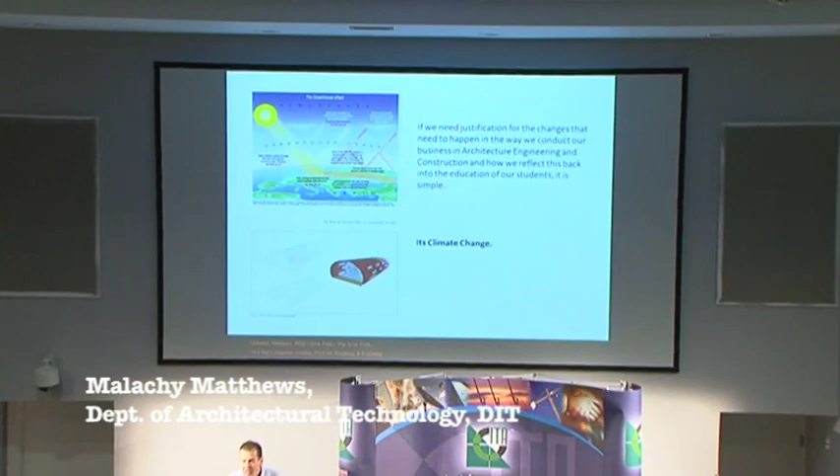Folks, if we need a justification for the changes that need to happen in the way we conduct our business in the architecture, engineering, construction industry, and how we reflect this back into the education of our students, it's simple. It's climate change. Kyoto protocols and the later protocols are starting to drip feed now down into and affect us in our business. Recasting of the Energy Directive from the EU, updating technical guidance documents Part L, all making our business extremely complicated, but having a direct effect on how we go about our business.

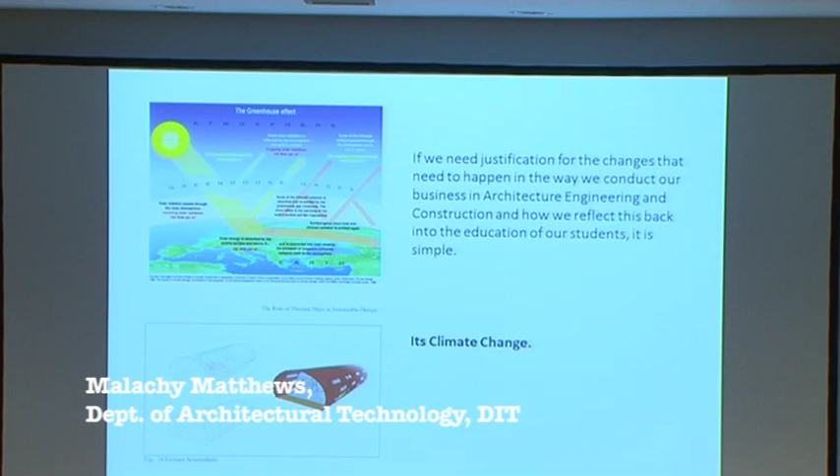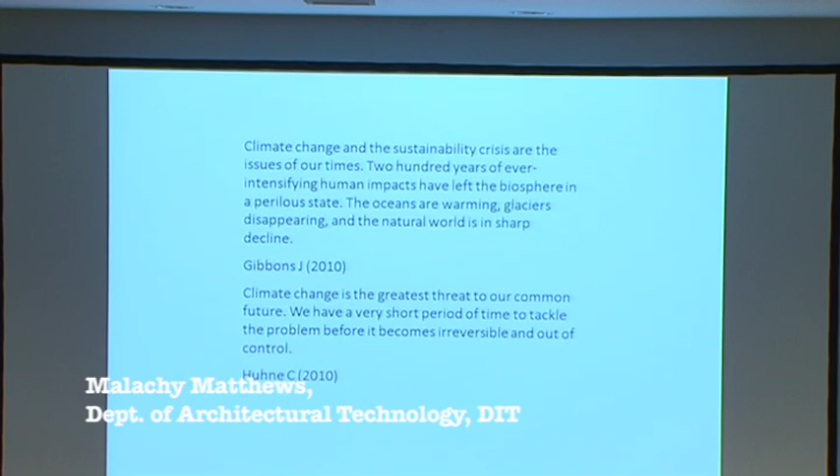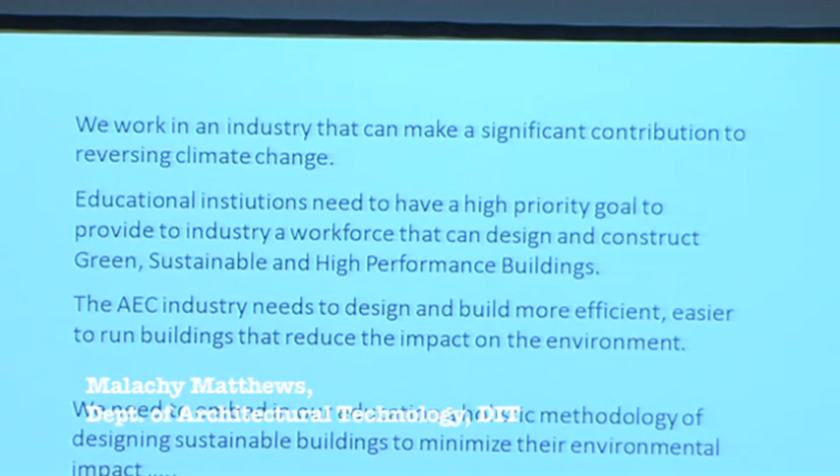Chris Huhne is Secretary of State for climate change in the United Kingdom, and he says climate change is the greatest threat to our common future. And we have a very short period of time to tackle the problem before it becomes irreversible and out of control. We work in an industry that can make a significant contribution to reversing climate change. Educational institutions need to have a high priority goal to provide to industry a workforce that can design and construct green, sustainable and high performance buildings.

The AEC industry needs to design and build more efficient, easier to run buildings that reduce an impact on the environment. We need to embed in our education a holistic methodology for designing sustainable buildings to minimize their environmental impact. This presents a challenge to the pedagogy by which we educate our students, and it presents a challenge in industry. That challenge in industry needs to be reflected back into the education of future graduates.

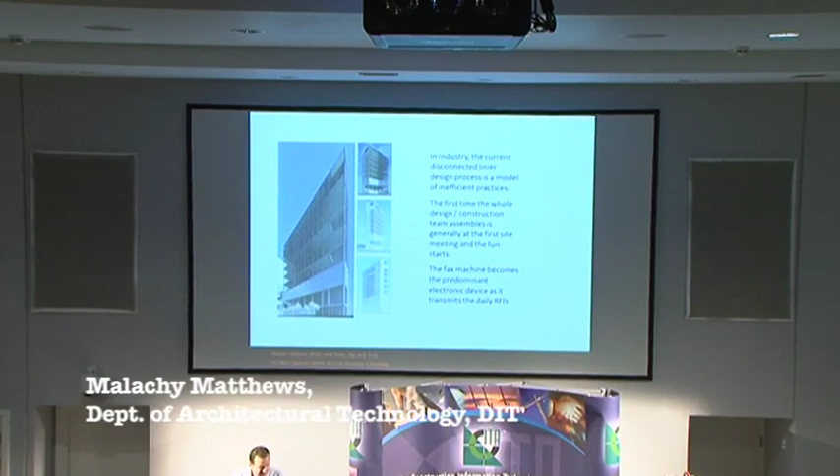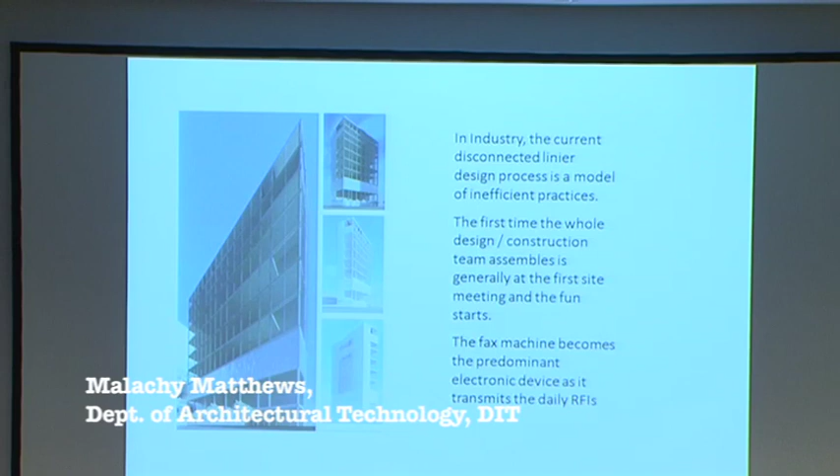In industry, the current disconnected linear design process is a model of inefficient practices. The first time the whole design construction team assembles is generally at the first site meeting where the fun starts. And the fax machine becomes a predominant electronic device as it transmits the daily RFIs. Any of us who have worked in construction know exactly what I'm talking about there. This linear process will have to change. And to do this, we face a major challenge. We operate in a system of hierarchy. The designers at the top, technical people in the middle, and the contractors left to put it all together and build it.

This is where BIM technologies and methodologies come into their own. The old hierarchies get moved aside. The linear design process gets binned in favor of a circular or elliptical design process where designers and technical professionals collaborate around the digital model, each bringing their own skills to the process in real time, and that's different. It's a bit of a utopian diagram, to be honest with you. To achieve that is going to take an incredible change of mindset, and perhaps that's the most difficult thing to achieve.

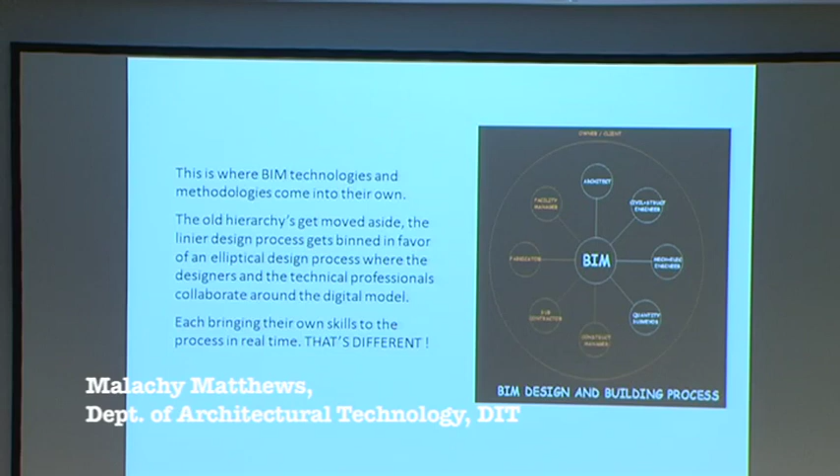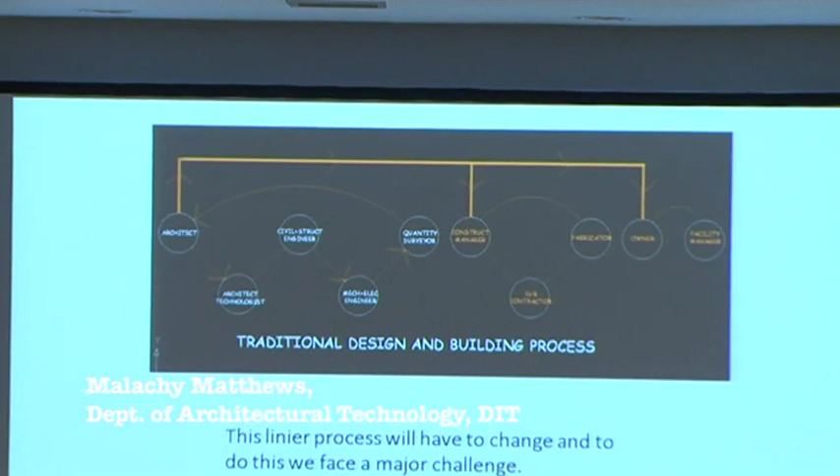Through my research over the last number of years, I've found that roles are blurring in the business. If I go back to that diagram, my colleague in DIT, Dr. Ken Beattie, who's involved in building services, will say, when it comes to the design of a building, why am I so far down the line? By the time I get the building, I can't influence the changes that need to happen in order to make this a more efficient building.

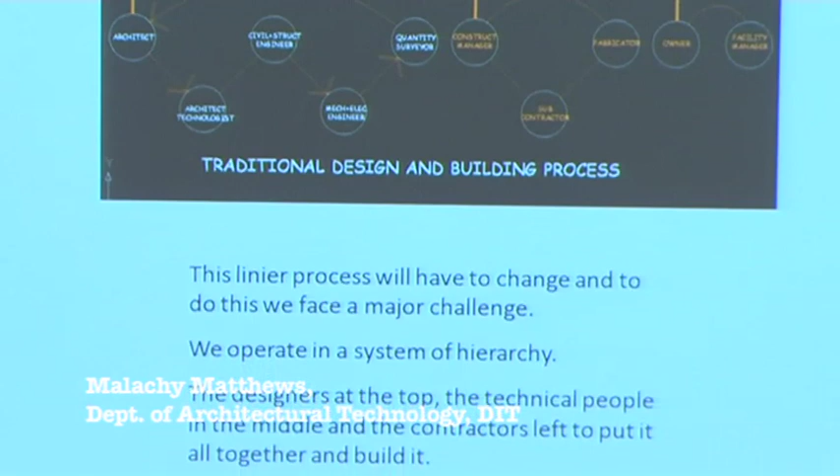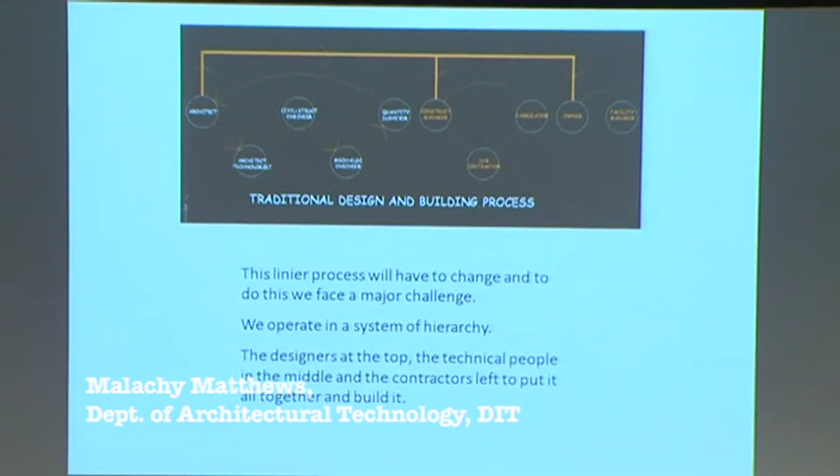Instead of being down the line, I want to be at the table, at the design, so I can bring my expertise in regards to simulation of options in order to give us a more efficient building. But if I'm too far down the line, I can't do that. Come back to this diagram of people operating and contributing to the model and then taking data out of the model.

It allows for that process to happen. It allows for people with these skills to be able to influence the design for a more complete, holistic and sustainable product.

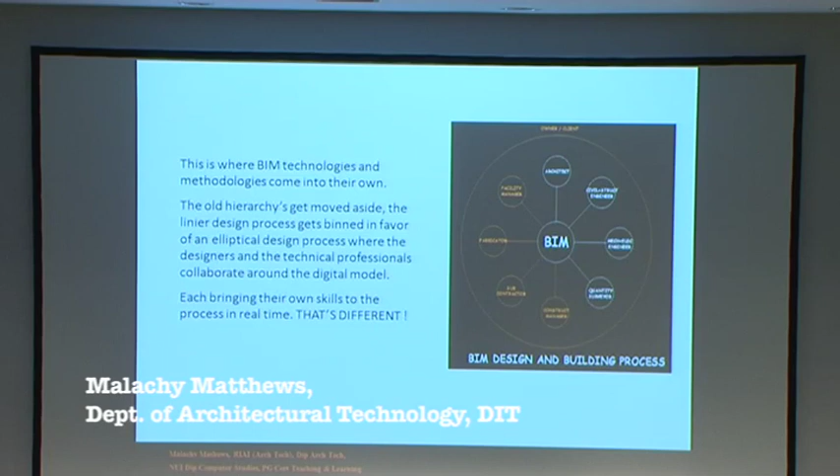In the concept, scheme and detailed design, we need to look at strategies. And this is a word that is going to become very familiar to you people in the business. Strategies for energy, strategies for solar, for light, building metrics, egress, water, airflow, fluid dynamics, system renewables, thermal comfort loads, sustainability compliance, value and cost and carbon footprint.

To achieve a holistic, sustainable design, I wonder, is there a case for what I call performative architecture? And that is architecture that's based not on the form of the building, but the function of the building, and the selection of materials influencing the function of the building.

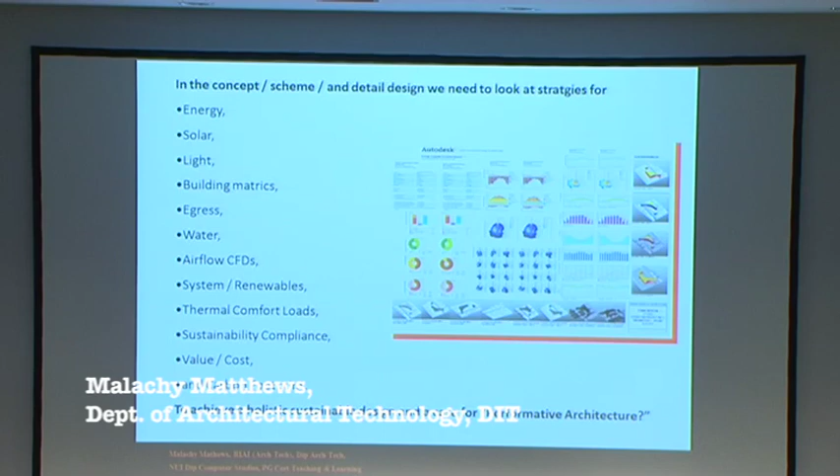There's a couple of examples of buildings I want to bring to you. Out in the City West, out that direction, I think you know there's an extraordinary building out there with an enormous glass facade on it, processing plant for printing, newspaper printing. If I ask you the question, was that building built for function, or was it built as a corporate statement? I wonder, what would you think?

You're driving kind of east to west. The building is prominently situated so that when you're driving, everybody sees this building. It's got an enormous glass facade on it. It's got all the manufacturing of the processing plant in behind it. During the summer, when you get a hot summer, solar radiation elevates the heating in that building to a point that the ink doesn't stick on the paper. Built for corporate identity rather than for function, in my opinion.

Another building that I worked in: the new Fingal County Hall out in Swords, a very, very modern building, and the architect had a fantastic attempt at bringing in sustainable technologies into the building. I worked in one of the wings up on the top floor, and natural ventilation was designed into that building rather than mechanical systems.

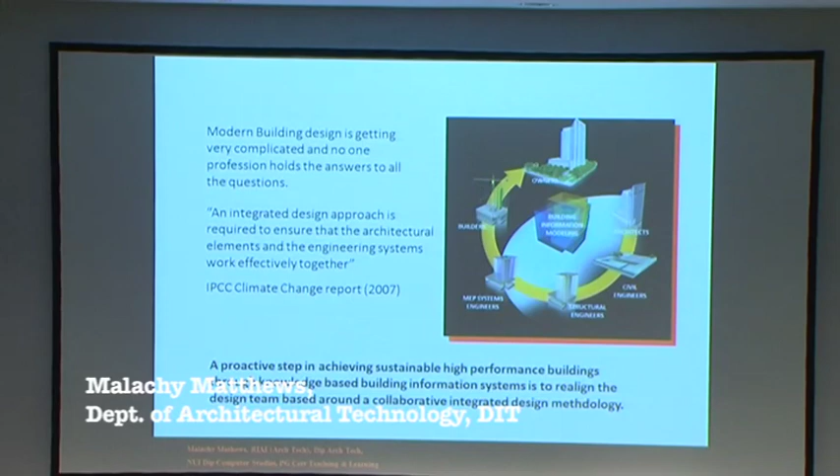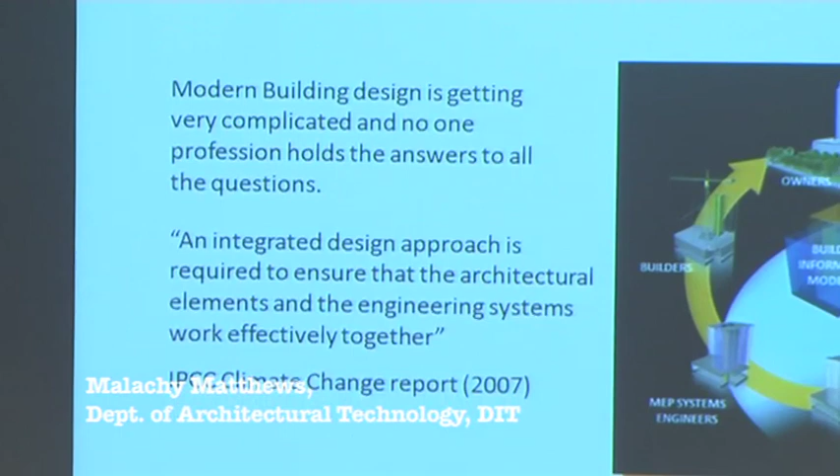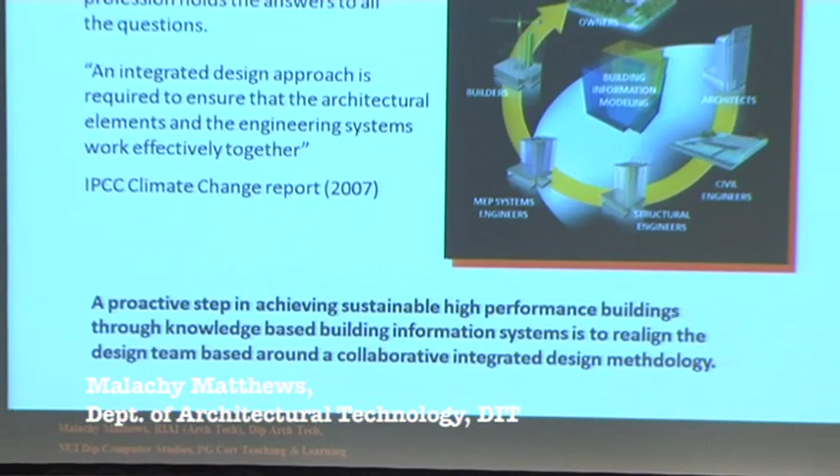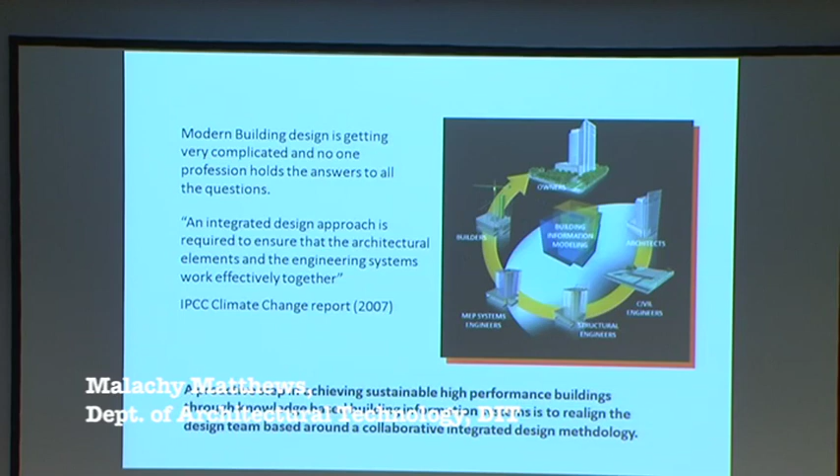The IPCC is the Intergovernmental Panel on Climate Change. In a report in 2007, they said an integrated design approach is required to ensure that architectural elements and engineering systems work effectively together. So perhaps a proactive step in achieving sustainable high-performance buildings through knowledge-based building information systems is to realign the design team based around a collaborative, integrated design methodology. BIM technologies provide the robust platform through its centrally located digital model and electronic collaborative methods to do this.

New building design and existing building retrofit can be analysed at both a macro and a micro scale using dynamic simulation methods. Now folks, this is something we're going to have to face up to in order for buildings to comply with new Part L regulations. We're going to have to go in and do this. You can sit down and work this out on a calculation basis, or you can go in and use dynamic simulation methods. We need to be able to measure what the changes are. If you can't measure it, you can't improve it. We want to be informed to develop strategies that will work for the climate, for the site, and for the buildings in question.

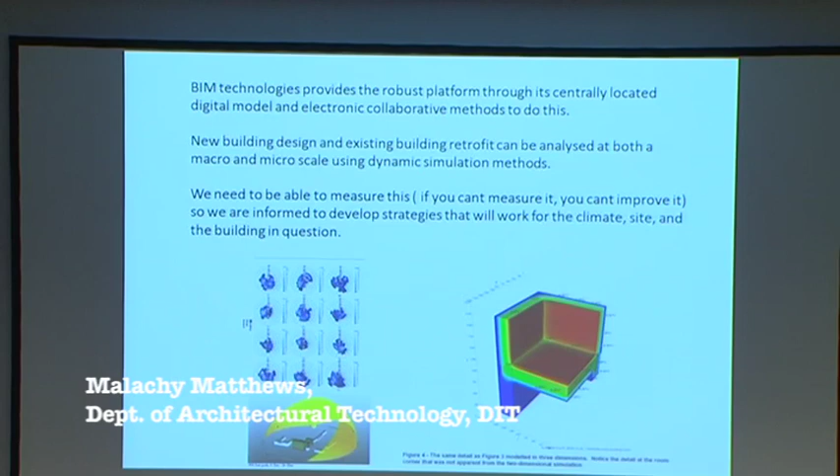That diagram on my left-hand side there is a 3D simulation carried out by one of my students in regards to an investigation in thermal bridging. This is as part of his research dissertation this year. But the advantage of doing this in 3D as against a flat 2D section is that he's pinpointed where the problem of thermal transmittance occurs, and it occurs in the corner, right in the corner. Now he wouldn't have been able to get that far unless he was able to do this in 3 dimensions.

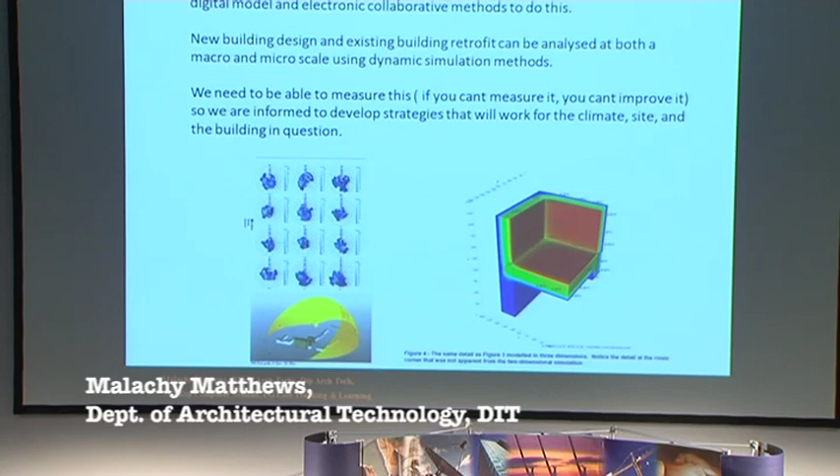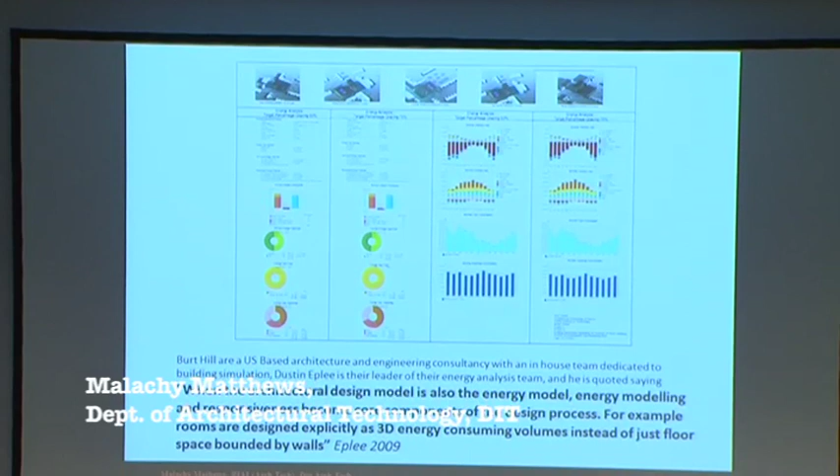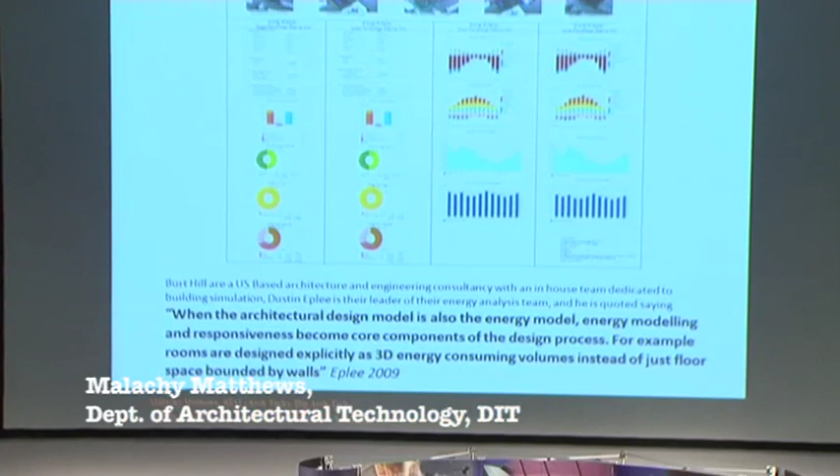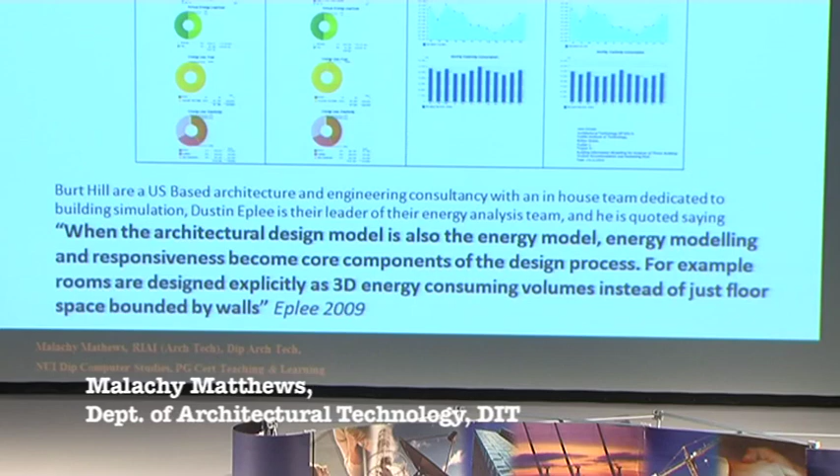Burt Hill are a US-based architecture and engineering consultancy. They have an in-house team dedicated to building simulation, and Dustin Eplee is the leader of their energy analysis team, and he's quoted as saying, "When the architectural design model is also the energy model, energy modeling and responsiveness become core components of the design process. For example, rooms designed explicitly as 3D energy consuming volumes instead of just floor space bounded by walls." This is thinking going beyond just form architecture. This is function architecture.

I want to give you a flavour of the dissertations that fourth-year architectural technology students have done this year. And I really feel that these students are pushing the envelope in regards to analysis and simulation.

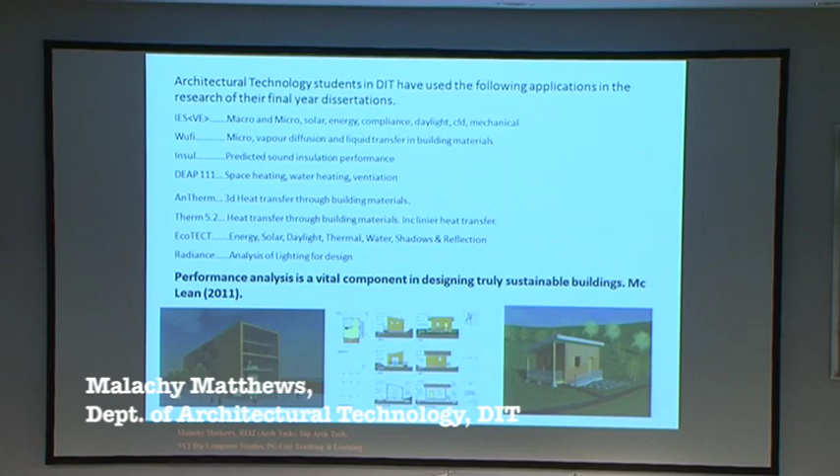These are the range of softwares that they're using. I'm sure you're familiar with a lot of them. IES, Don McLean's software developed over in Glasgow, can be used on a macro and micro level for analysis of solar energy compliance, daylight, CFDs and mechanical. WUFI is a German software used on a micro level, and one of the students is doing his dissertation on vapor diffusion and liquid transfer in building materials.

INSUL is a predicted sound insulation performance, so it involves acoustics and the acoustics of materials and how materials affect acoustics. DEAP you're more than likely familiar with. That's our Part L base standard. AnTherm is the 3D heat transfer through building materials. That's what the student used in that illustration I showed you. THERM 5.2 is the 2D version of AnTherm.

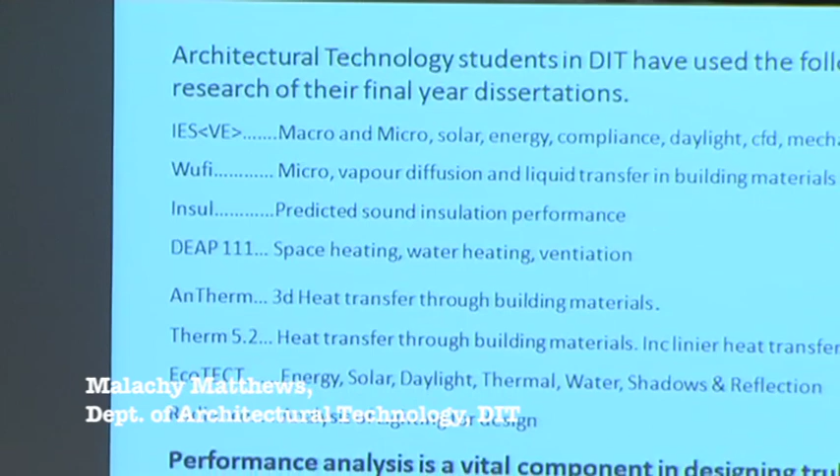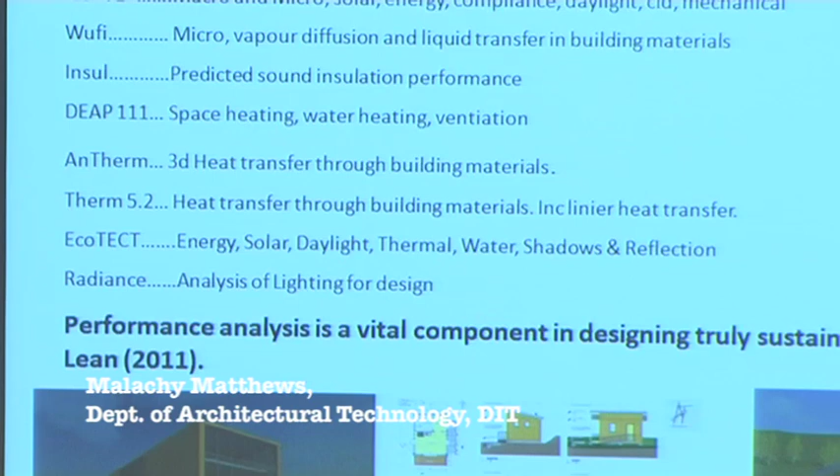Ecotect is now an Autodesk product, and again is a whole energy analytical software for energy, solar, daylight, thermal, water, shadows and reflection. And Radiance is an analysis of lighting for design. Don McLean in Glasgow says that performance analysis is a vital component in designing truly sustainable buildings. I'd say that predictive analysis is set to become an integral part of building design and retrofit.

I know that local authorities are under severe pressure in the next decade. All of their building stock, their housing stock, their commercial stock, their civic stock has to be brought up to meet the demands of the TGD documents. So all those community housing that you see, each one of those has to be looked at on an individual basis, and what strategies are they going to formulate for that building to meet the Part L requirements. In order to test options and strategies, they're going to need to run simulation. And if they don't have that expertise in-house, they're going to have to look outside for that expertise. There is enormous potential there.

Retrofit is the name of the game in Ireland for the next 10 years. We've been told to do it, we've been directed to do it by the EU, there's no choice, we have to do it. Where we're going to find the money to do it, another problem maybe, but this is something we have to achieve. So if I was in business, things like BIM technologies are things I'd be looking at.

I see the future of practice changing. No longer are you going to have, in my opinion, the firm of architects in Merrion Square, the firm of engineers in Harold's Cross, the mechanical and electrical guys in Fairview, all coming to site and meeting there. To me, the smart guys in practice are going to set up cooperative pods of interdisciplinary practices. How it's set up is their business, whether they are collaborative or whether they're partnerships. I'm not concerned with that.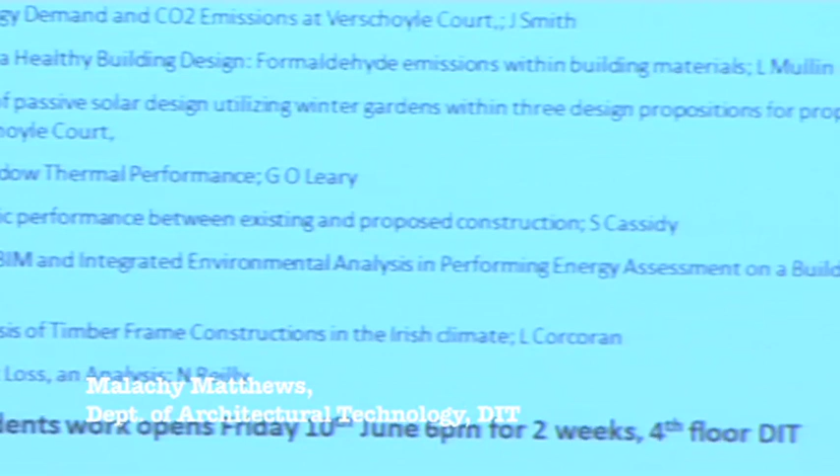There's another one that I don't have here, but I was talking to one of my colleagues there this morning about it. What this student has done is he's taken one of those shell buildings, like the Anglo building that's out down by the docks there, which is a concrete core at the moment. That's been sitting there for a couple of years.

So how do the new regulations impact on that building? And what changes do you need to do in order to make that comply with Part L? That building has an enormous amount of glazing in it. Now, 3 years ago, that might have been fine. Now it's not, because the requirements of Part L put on glazing are such that you need to go into very expensive glazing in order to conform to Part L. So there's a new strategy required for that.

So wouldn't it be nice to model that up in BIM and run options on it, run strategies on it for glazing, and possibly even recladding it, taking an amount of the glazing out and recladding it with solid cladding or something like that. Okay, you have to go for a new permission on it, but waiting another couple of months or something like that, against a possible bill of $250,000 in order to put the glazing in, it makes sense to me.

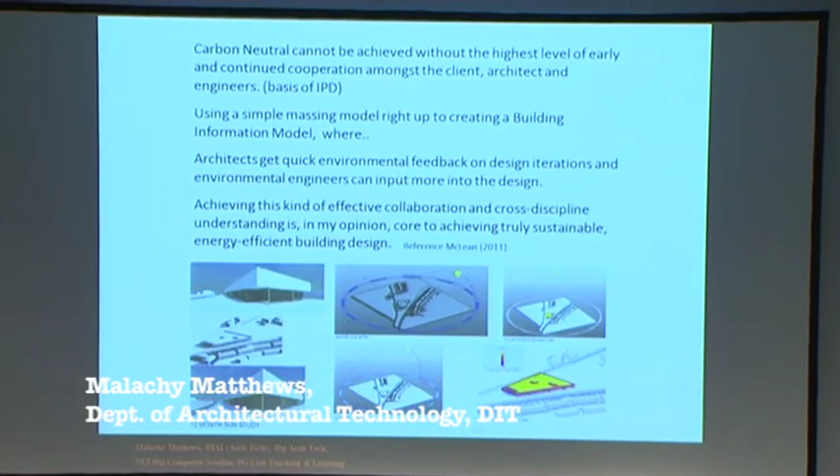A hygrothermal analysis of timber frame construction in the Irish climate. We have an exhibition of students' work that's open from Friday the 10th of June for 2 weeks. I would encourage you all to go along and have a look at that. It's on the 4th floor in DIT, and you'll see real life examples of this analysis going on. Carbon neutral cannot be achieved without the highest level of early and continued cooperation amongst the client, architect and the engineers.

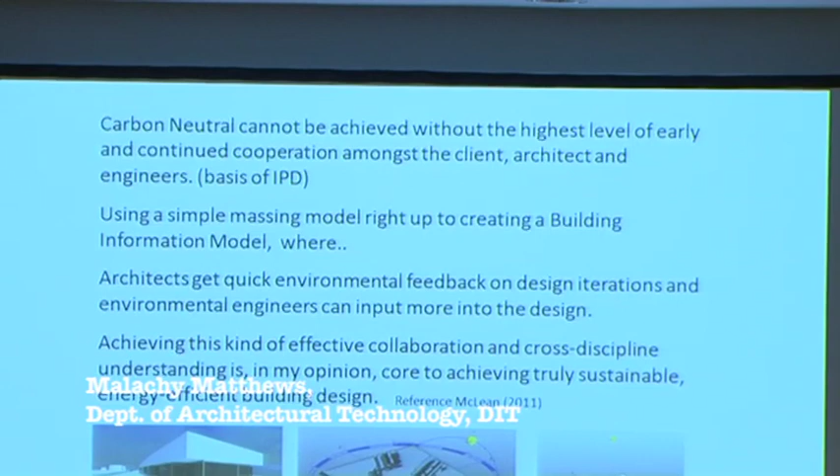Again, my colleague, Dr. Ken Beattie, is fond of asking this question. I'd like to ask it here. How many people does it take to do a building information model, to run an analysis, to run options on that analysis? Are we saying 3 people? Building services engineer, technologist, architect? Who would say 3? Who would say 2? Who would say 1 person could do all of that? That's the majority view. That's interesting, isn't it? That's what I mean about the blurring of accepted roles, of traditional roles.

Now I know this architect's going to go, what are you talking about? I'm not going to let any building services engineer affect my design. Why should I do that? Well, there's the challenge for the architect straight away, because that's going to have to happen. I know the services engineers are going to stand up: I'm not going to let the architectural technologist do my job. But isn't it interesting that building services contractors get paid for the amount of plant they put into a building, while we're trying to design the plant out of it? There's a challenge.

Each of these challenges is discipline specific, and in your own discipline, you face your own challenges. But it comes together under the umbrella of collaboration, and you are going to see blurring of roles, there's no doubt about it. Architects using simulation can get quick environmental feedback on their design iterations, and environmental engineers can input more into the design. That's Ken Beattie's dream. It's his dream for his students as well. Achieving this kind of effective collaboration and cross-disciplinary understanding is, in my opinion, the core to achieving truly sustainable, energy-efficient building design.

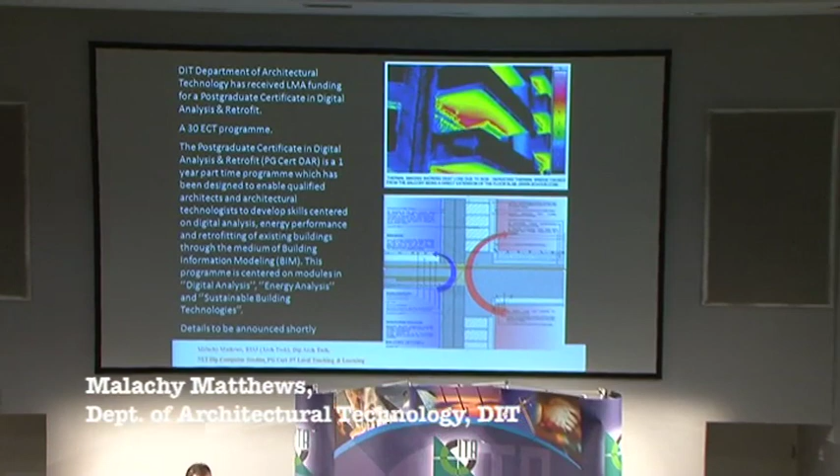Government are announcing today the LMA funding. The Department of Architectural Technology has been awarded LMA funding for a postgraduate certificate in digital analysis and retrofit. This might be of interest to you or some of your colleagues. This PG Cert in digital analysis and retrofit is a 30 ECTS credit program. It'll be a part-time program designed to enable architects and architectural technologists to develop skills centered on digital analysis, energy performance and retrofitting of existing buildings through the medium of building information modeling. Keep your eyes out for that; I understand it is being announced today.

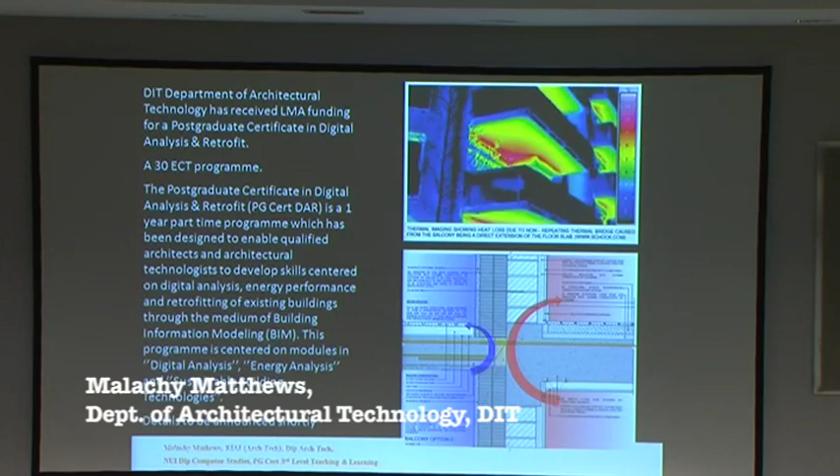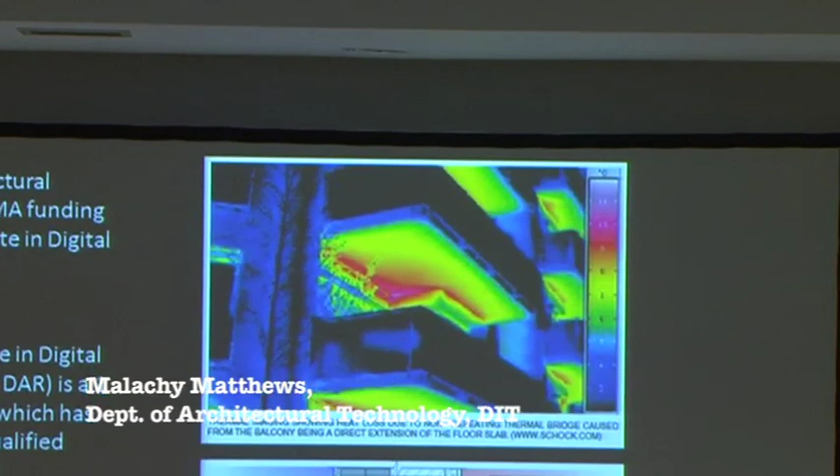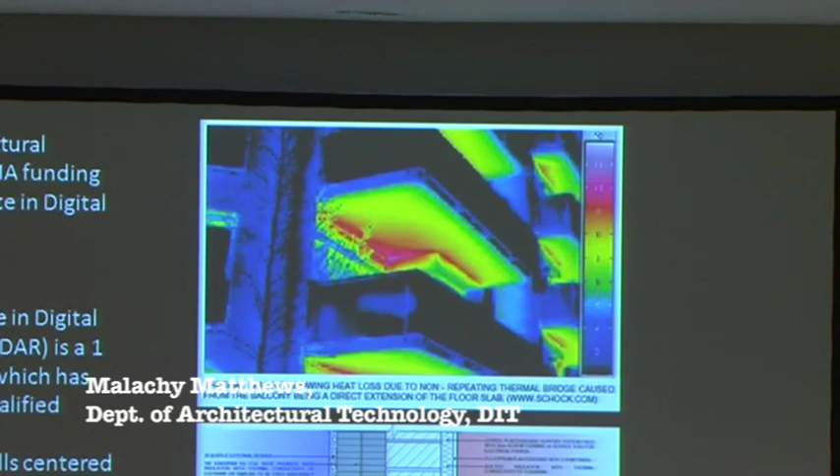2 diagrams I want to bring your attention to here. That's a thermal imaging map of your typical balcony that you get in an apartment building. And you can see the amount of heating energy leaking out through the connection back into the structure, which is taking the heating energy and bringing it out. This is one of the thesis dissertations done this year, in which the student has actually calculated the amount of energy that flows through the reinforcement and through the steel, from the building out to the external balcony, and a proven and analytically worked out method of preventing that.

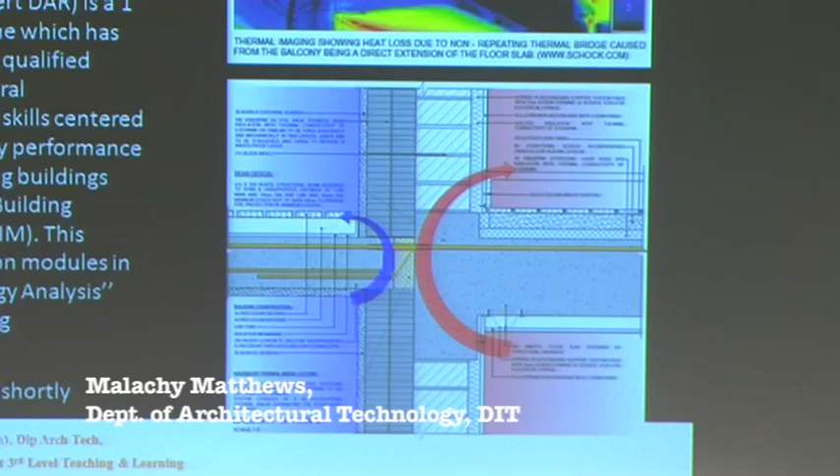I think that gives you a flavour, and I have the benefit of being in academia, so I can throw out challenges very easily like that. You're the guys in practice, and you're the guys who have to face up to that. Thank you.